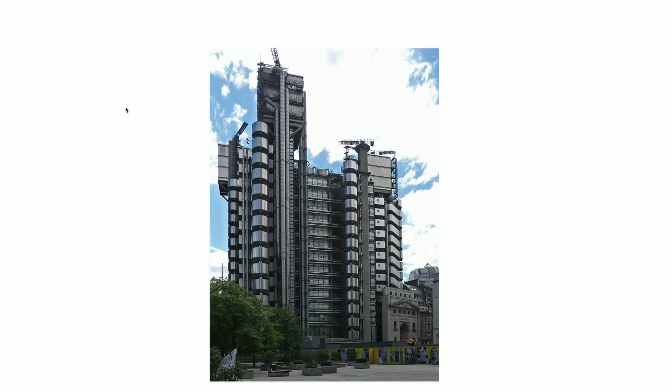So, a bit about my background. I started working with Ove Arup, and this was the building I got my site experience on. You might recognise it, the Lloyd's of London building. And that was cracking up during construction. They've got all those reinforced concrete columns on the outside. They're about 1.2 meters diameter, and they were getting plastic settlement shrinkage cracks. So we had to actually fill them in with resin during the construction. So that was just by the by.

And then I went to work for Scott Wilson, and I was working on the refurbishment of what was the Charing Cross Hospital. This bit is a Grade 2 listed building designed by Decimus Burton, who did the Palm House at Kew Gardens. And it was being converted to a police station, because Charing Cross Hospital is now in Hammersmith. People wake up in hospital saying, where am I? You're in Charing Cross Hospital. This looks like Hammersmith. It kept its name and just moved over.

The reason I put it up is that that's all stucco rendering. It's a cheap way of making it look like stone. And it's actually all solid brickwork behind, bedded in lime mortar. Now, I was working on this in the late 1980s. And the interesting thing was, I'll talk about how good lime mortar is for buildings, when we were doing all the specification for the repair work, I don't think we mentioned using lime mortar at all. As an architect, yes, I can see you squirming, you'd get hung, drawn and quartered now if you didn't. But it was just accepted.

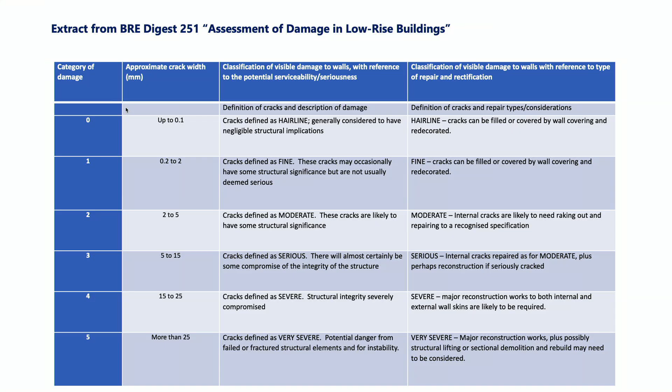What they should say is there is a crack below the ground floor lounge window, and it's of a certain size. And they should refer to this table, because if it goes up to 2 millimeters in size, then it's 0 to 1. That's saying it's hairline, and you don't need to do very much with it. So one line describing the crack, and adding that table to the valuation, gives you a heck of a lot more information, especially to the mortgage lender, because mortgage lenders aren't technical, so they don't know whether this structural movement is bad or not.

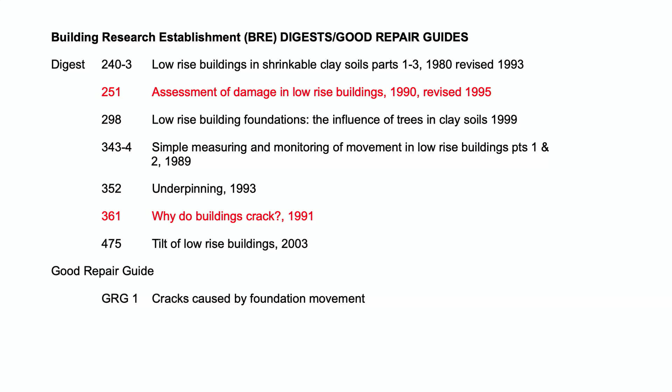I'm getting a few quizzical faces. But just to go back, that's 251. The other one that I think is quite useful is 361. This document has a list of cracking that is not due to foundation movement. So they're the two BRE documents I think one should have.

The other thing is books. I was speaking to somebody, and I can't find the book now. Where would I put it? It was a BRE book called "Has Your House Got Cracks?" Who was it I was speaking to about it? Oh yes, it's you, right? I brought it in, and I may have left it at the back. Yeah, is that the book? Oh yeah, because it's a really good book. It's that one. It's actually for homeowners, but it does go through all cracking.

The other book that is quite good, structural engineers in here will know the first 2 editions of it, is Subsidence of Low-Rise Buildings, this book here, which, I must admit, for a surveyor is probably quite heavy, and there is a complete rewrite of it called Subsidence. Nice, snappy title. But the best book that I think there is on cracking, this one, is now sadly out of print. I don't know if everybody knows of this: Cracking by Peter Dickinson. Nope. I'll be using a part of it.

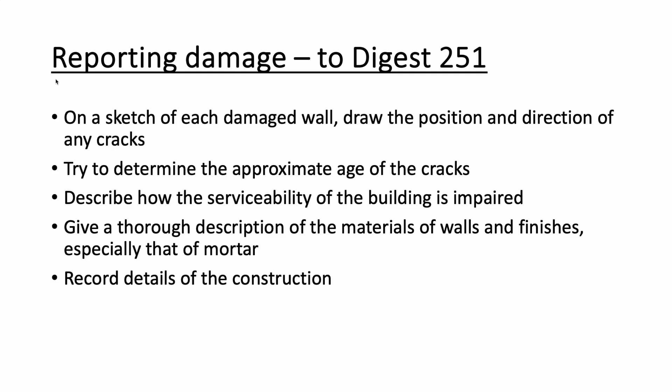Give a thorough description of the materials. Now that's important because I will talk about buildings with cement mortar and buildings with lime mortar. That's certainly one thing that's quite different. Are they solid walls? Are they cavity walls? Are they stone, etc.? So knowing your wall construction is vitally important. As I say at the bottom there, record details of the construction.

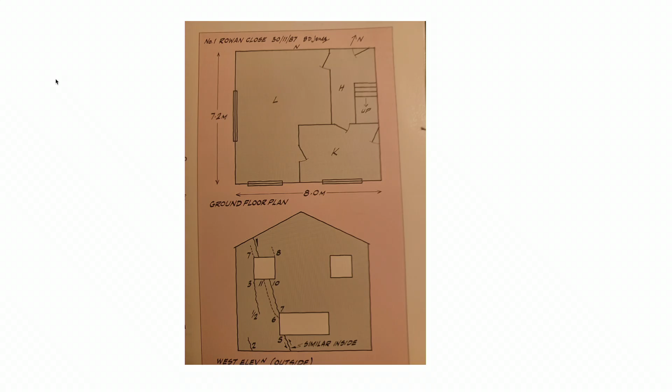This is an outside, as it says. Where it's a solid line, that's a crack on the outside. And where it's a dashed line, that's a crack on the inside. So we've got cracks on the outside and on the inside lining up. So we'll go on to that, but that's another marker for it being foundation movement.

And it also refers to doing plumb surveys and level surveys. I've never really done that actually, so perhaps a bit more detail if it's a building about to fall down, that looks as if it's got major movement. And we'll talk about major movement, because I know that JJ likes buildings that are collapsing or have got major movement, so I'll come on to that later.

If you've got shallow foundations, just the natural variation of having a wet winter and a dry summer will make that clay shrink, foundations go down, houses crack. While in South Wales, I only get 1%. I do get mining subsidence there, although somebody was saying they have mines in Kent, down there, and up in Yorkshire and Nottingham, somewhere around there.

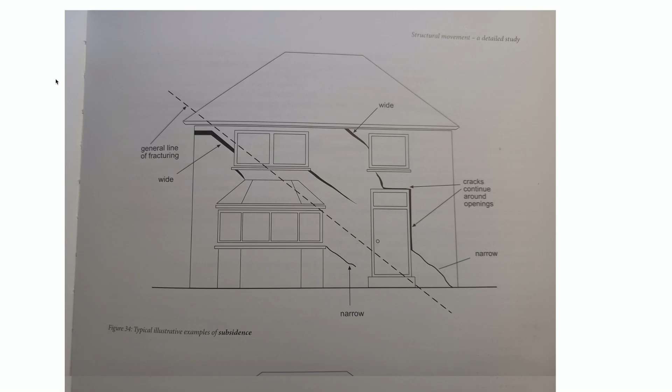If you just have cracks on one face, not the other, and there'll be a case study at the very end, which I only did last week actually, so I had to rush it to JJ, that is purely cracking on the outside and not on the inside. What else? Oh yeah, the sloping line. But when I was putting all the slides together, I was thinking, oh God, I don't think many of my case studies of subsidence model that exactly, but they do in a way. So we'll go through that.

How are you going so far? Any questions? Nope.

Right, and then the next thing to do is to work out where the movement is, is to look to see if there's a big blue arrow on the building. No. I think Malcolm Hollis, on one of his talks I saw videoed, said, "The hand of God will point down and show thee where thy building is moving." So if you take a line, that's a general line of fracturing, and then take a line at 90 degrees, and point it downwards, hopefully it tells you something's going on around there. So the building, or the cracking, is telling you what it's doing.

I mean, going back to the very first one, I say why I love that job is that it's like a story. You're doing a pathology thing on it, a bit like a pathologist cutting open a dead body. They're finding the history of how that person died and why they died by looking at all the clues. So all the clues are there for what's happening, and all those things want to tie up. So if you've just got one thing, but not all of them, then you haven't got foundation movement or subsidence.

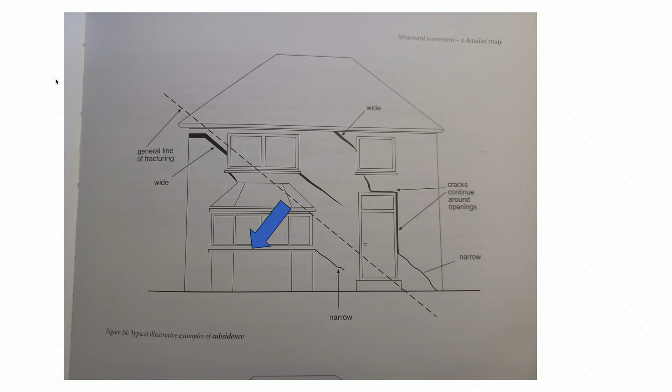And this is the other way. So when you say we're on shrinkable clay, and you've got trees nearby, then you say, "I'm going to cut them down. I don't want those trees there." That is what you get. Those trees were sucking water out of the ground. Cut them down, and they stop doing that.

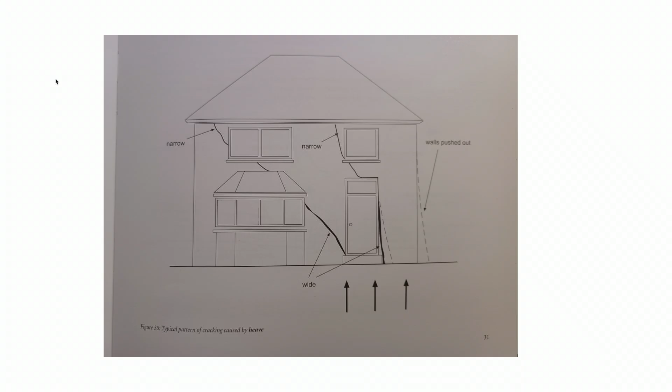The ground recovers, and because I live in the 1% of the country that doesn't have it, I haven't got a great experience, but I have heard that the heave can be worse than the subsidence. So it's just subsidence in another direction. So there's helpful arrows there. Again, when you do surveys, you won't find arrows in the ground like that. So it would be helpful if they were.

I was saying to somebody that I've only had one case of mining subsidence that I've investigated, but most of the time I'm designing things to mitigate against the effect of subsidence. So I said that could be a raft foundation. So actually when I go back tomorrow and the day after, I'll be designing a raft foundation for a new house. So that makes it nice and stiff.

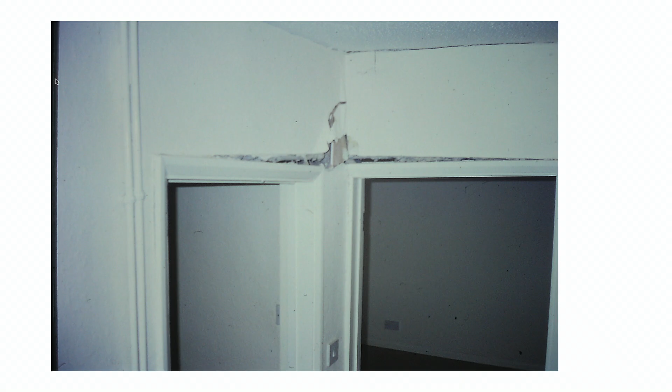Just to confirm, this was inside, so a slight gap there. You can do the hoovering underneath the skirting board then. And doorways moving a bit. They've just been all refurbished, and actually it shows you the quality of the refurb. Somebody just stuck a bit of plasterboard in there. But it didn't matter, because as I say, they just got demolished. Bit of a gap there. So just really dramatic movement. I've never come across dramatic movement like that.

And actually, when I keep on talking about subsidence, this was before I went self-employed, which I did in 1992. Since then, I've probably come across about 4 or 5 cases of subsidence. So most of the cracking I come across is not.

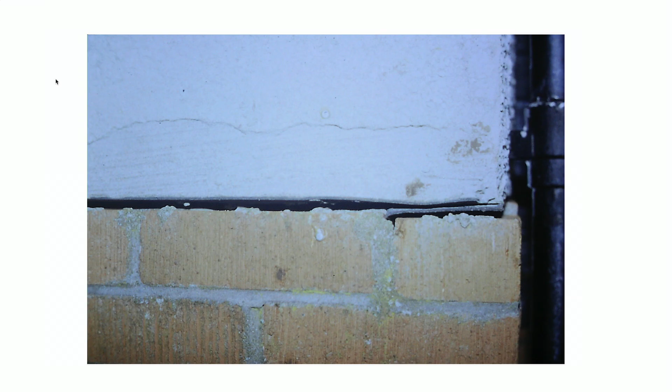And then this is round the side, not towards the back, so you can see this opening up there. So again, this is not typical sloping cracking, but it's gone there because that's where the DPC is. So that's obviously a weak point in the building, and that's a close-up. I don't know if you can see, but there's a stainless steel stud, there and there. They're about half an inch diameter, and they've got a little hole in the middle, so you can put the pointers for the vernier gauge into them and measure the cracking.

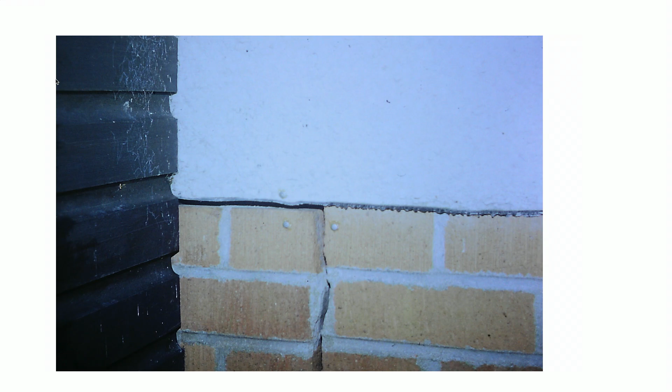So what we did there was find that the rainwater pipe, which is just there on the right-hand side, wasn't going anywhere. It was just saturating the ground around. So we built a soakaway right at the front of the house and took the water down there. And this is round the corner at the back. You can see the studs there again. That's quite a good way, because then you can measure downward movement and outward movement, because you've got both there, because that's basically the wall just settling down and moving out.

Right, this is about 5 or 10 years ago. This is actually a house owned by a father and an estate agent, and he didn't have any insurance on the house. So he had to pay for all the piling that was done himself.

So you can just about see some cracking there and there. Again, it's not very typical sloping cracking, but it's not, well, I'll talk later about non-foundation, which is mainly thermal shrinkage and expansion. No, it is certainly not that, because if you look at it in closer detail, you can see both the perpends or the perpendicular joints moving and the bed joints have moved down.

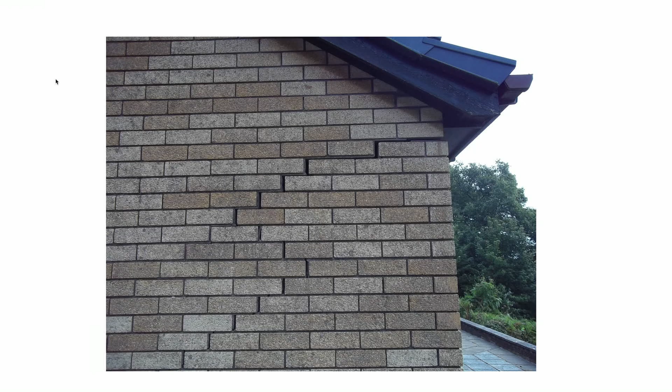What we did there, so I don't know if it was this. So if I just go back. Right. Basically, we knocked down all the left-hand side of that elevation, and probably a bit of the return, and then put piled foundations outside and inside. So I'm not talking a lot about repairs. I just did this zigzag inside and outside because we kept the old foundation in there.

Because we did a site investigation and we found out that the foundations, which were reasonable depth, about 2 foot down, 600 mil, were just resting on crap, which is a technical engineering word for not very good founding material. There's a thing called an SPT, standard penetration test, and it sounds great, but you've just got a hammer and you thud it down, and you see how many blows it takes to go through a certain amount, I think about 3 inches, 75 mil.

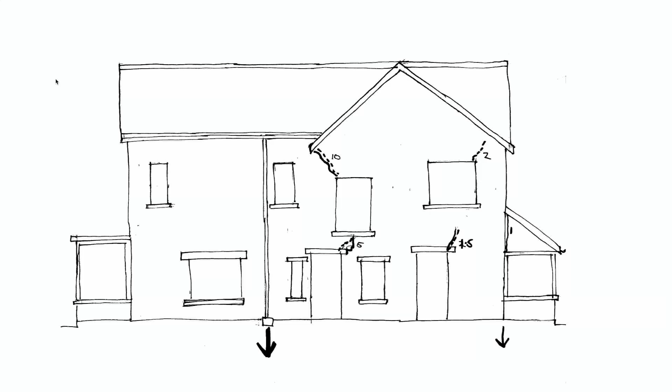But I did this wonderful sketch because the garage is here, so it prevented that. So what you get to see is a whole mess of doors and windows and openings, because structural engineers would be much happier if a wall didn't have any openings or doors at all, much stronger. You say, what are your doors and windows for? But it's just a mess.

So in a way, it's no surprise. I put an arrow there, an arrow there. So obviously, the biggest culprit is a leaking gully from that rainwater pipe, causing that. So again, you've got, in effect, movement. If you've got a door opening, then basically the crack can go up there and then start there. So you've got 5 there and 10 there.

And again, I've drawn a solid line for the outside and a dotted line for the inside. They line up. They increase in size. They go from ground up, so all the factors for it being subsidence movement were ticked there. And a bit there as well, actually. So on that plan, the drainage was mainly towards the back of the house, so you got leakage from there. So you've got 2 areas of movement there.

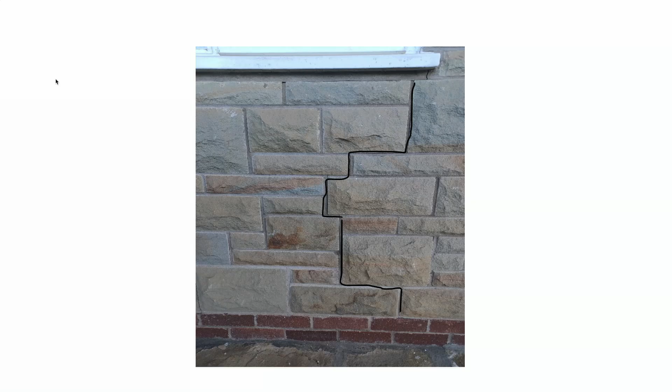And again, the owner had drawn a nice moustache along the line of the cracking, but that's where it was. And you can see it just looks like really strong mortar. Sometimes the cracks won't go through the mortar because the mortar is too strong. The brickwork or the stone or the concrete blockwork, in effect here, will crack instead.

Oh yeah, I just forgot. The other reason I brought this along is to say that brickwork and concrete blockwork is great in compression. Most of the time, that's what it's doing: the loads are going down and squashing it. It's not a drawback, it's just a feature of it. Same with concrete blockwork. It's about 10 times weaker in tension than in compression. It's probably got a compressive strength of about 10, 20, 30 newtons per millimeter squared, but a tensile strength of 1, 2, 3 newtons per millimeter squared. Catch.

So yeah, that's why you get cracking in there. During the day, especially on a sunny, very warm day, it expands out, and then it gets to a corner, which is a point of restraint, and everything goes into compression. Then at night it gets very cold and it relaxes, and as it relaxes, it's all going into tension. So that's when you get the cracking.

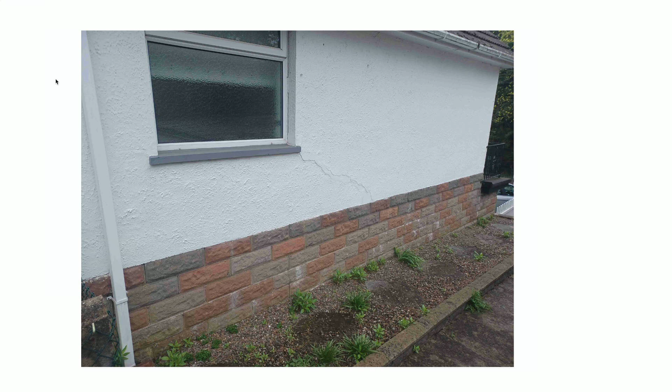Now, again, because it's diagonal, I thought, okay, well, it could be. You've got a diagonal crack in there, and you've got lots of cracks along there. But my cracking spider senses were going, bloody concrete reconstituted blockwork again. Painted. I hate bloody reconstituted blockwork with a passion. And pretty vertical cracking, and again, going through the block because the mortar is far too strong. Naughty bloody bricklayers.

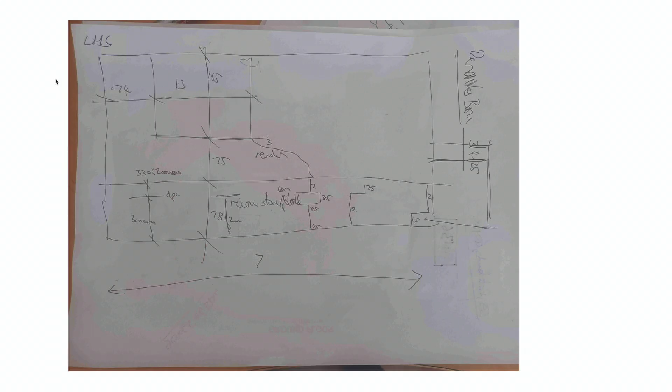There. And then I did some wonderful sketches, because I wrote the report yesterday actually and sent it off. And I tidied it up a bit. But these are my site notes for there. So again, it's measuring the crack size, where it is, and just giving dimensions. I could sketch it fairly accurately to scale. And then that's on the other side.

And when I went into that side, I started thinking, nah, this is not subsidence at all. Mainly because I hadn't got that window with that diagonal cracking. And the cracking was purely in the perpends there, nothing in the mortar beds. And then a sketch again. But no cracking on the inside.

So this is in the garage. The garage was lower down and the bungalow was above it. And that's the other side, no cracking at all. So again, I could immediately rule out subsidence, and it was just due to expansion and contraction. There's no cracking on the inside. So that's the bathroom upstairs, where you got the sloping cracking on the outside.

Another interesting thing was, is anybody here associated with SAVA? Because I gave a talk about retaining walls the other week. Right, yes. Because I was talking about trespassing. Because I thought, well, look, it's a mirror. That's a party wall line, so there's an identical property on that side. I wonder if they've got the same kind of cracking on there. So I knocked on their door, there was no reply. So I did go through their garden gate there.

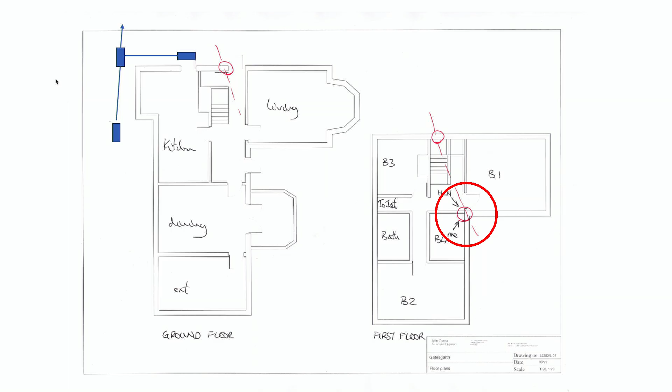What repair did you recommend on the slide you showed with the drainage issue on the side of the house? So the question is, what did I recommend for the repair on this house? And the answer is, repair the drains, do the superstructure repairs. There was quite a big crack here actually, because that wall had just separated away. What the builders had done, they concentrated on getting continuity around the corner for the cavity wall, but this was just butt jointed on. So there, I recommended putting some Helifix ties to bond it together. Does that satisfy you?

Any others? Have you come across any stress fractures or cracking as a consequence of cavity wall insulation? No. The question was, have I come across any cracking due to cavity wall insulation? No. Although, is anybody in the Facebook Surveyors Hub community, run by Marion Ellis? Because that was on recently. That was a Laing Easi-Form thing, which is obviously a non-traditional house, which I think has got reinforced concrete panels, and the question there was had the ties between the two panels corroded. And I said, well, it could be at an edge of a reinforced concrete panel, or it could be, I don't know.

I can't think there's a very large expansive force. If they put expanding foam in, I suppose. No, it's more the saturation of the wall. I don't think so. Sorry, I doubt it. But I don't know because I've never come across it.